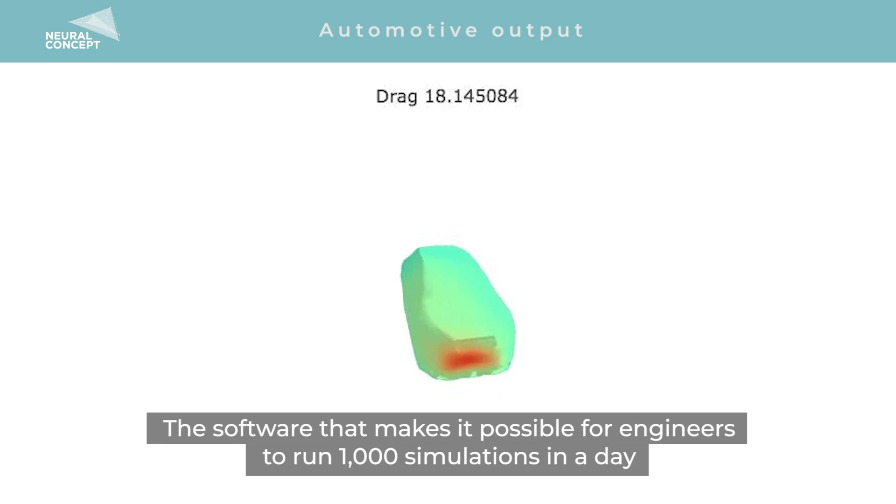Hello everyone, my name is Pierre Baque. I'm the founder of Neural Concept, the software that makes it possible for engineers to run 1000 simulations in a day and to design 20% more efficient products. Please, let me tell you about our story.

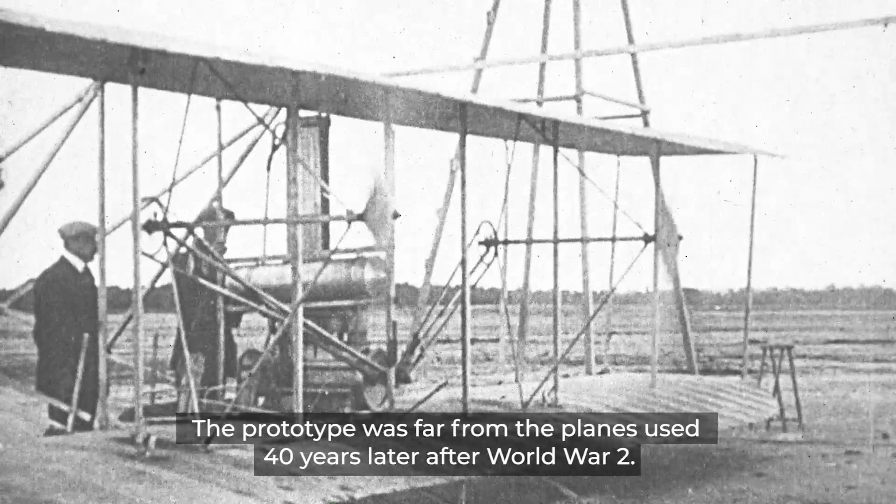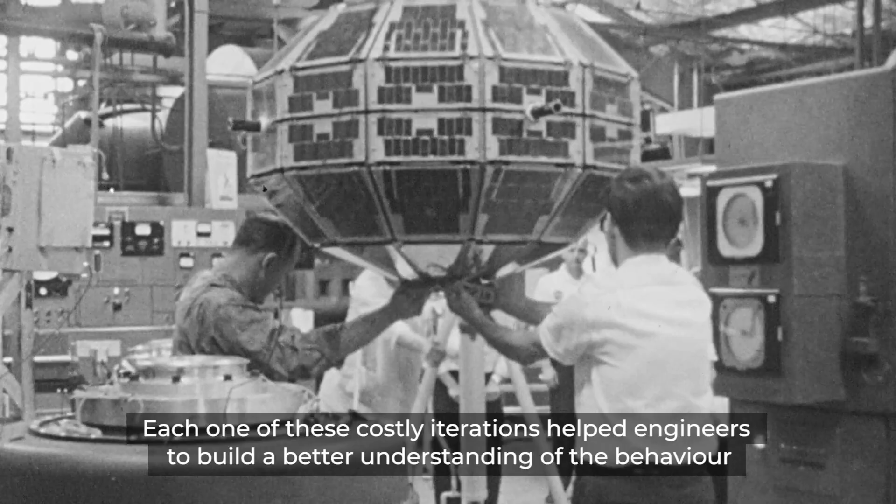120 years ago, the Wright brothers made the first successful manned aircraft flight in history. The prototype was far from the planes used 40 years later after World War II. This evolution was possible thanks to the efforts of millions of engineers who created and tested thousands of prototypes. Each one of these costly iterations helped engineers build a better understanding of the behavior of the aircraft and derive some general rules.

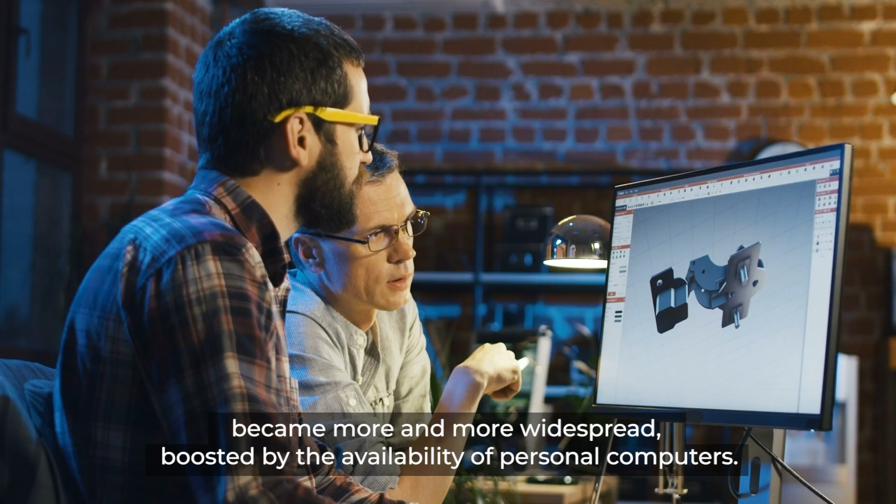These rules and intuitions would then be used to guide further design iterations. Starting from the 80s, the usage of numerical simulation in engineering became more and more widespread, boosted by the availability of personal computers. Numerical simulations are now used in every field of engineering, ranging from nuclear physics simulations for the control of energy reactors to the simulation of blood fluid mechanics for the prevention of heart attacks.

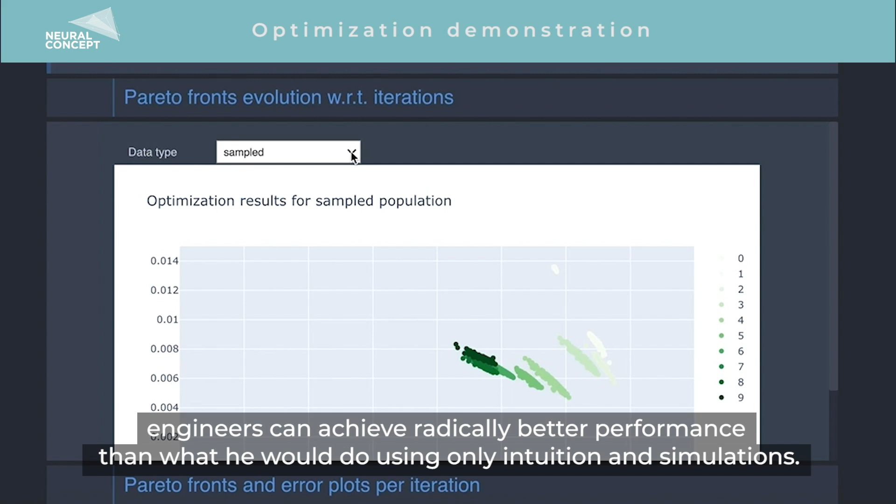As we have entered the 21st century, simulations have become ubiquitous to engineering, but humanity is confronted with new, seemingly unsolvable technological challenges. One hope is that with the help of a computer and complex algorithms, engineers can achieve radically better performance than what he would do using only his intuition and simulations.

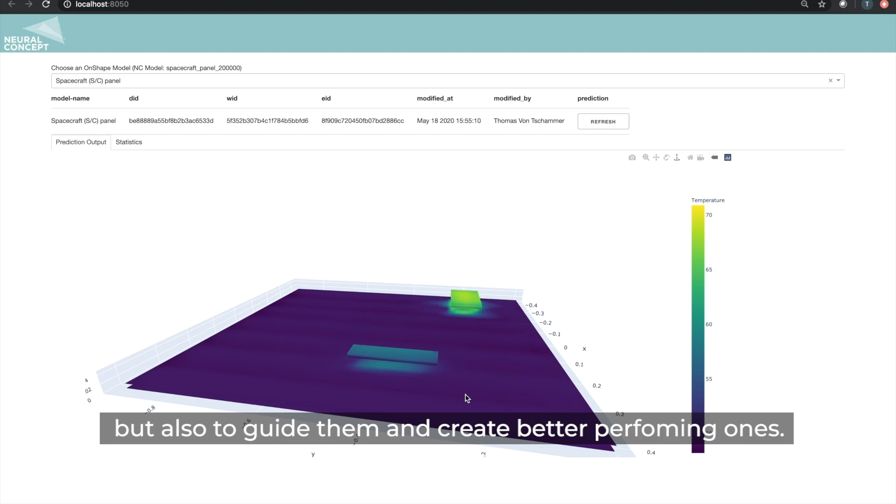Today, already, these optimization algorithms created 50% lighter parts for an Airbus plane or a 20% more energy efficient drone. Neural Concept provides engineers with the right tools not only to evaluate man-made designs, but also to guide them and create better performing ones. With the help of a computer, an engineer can achieve radically better performance than what he would do only using his intuition and traditional simulation tools.

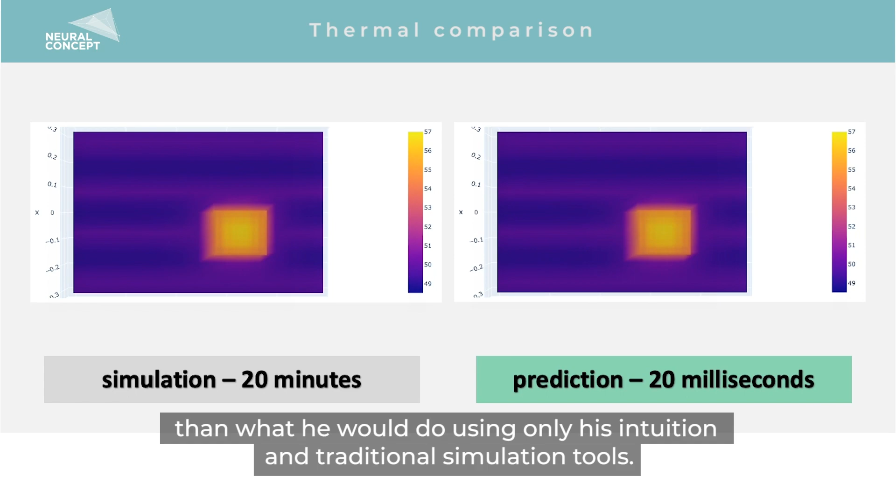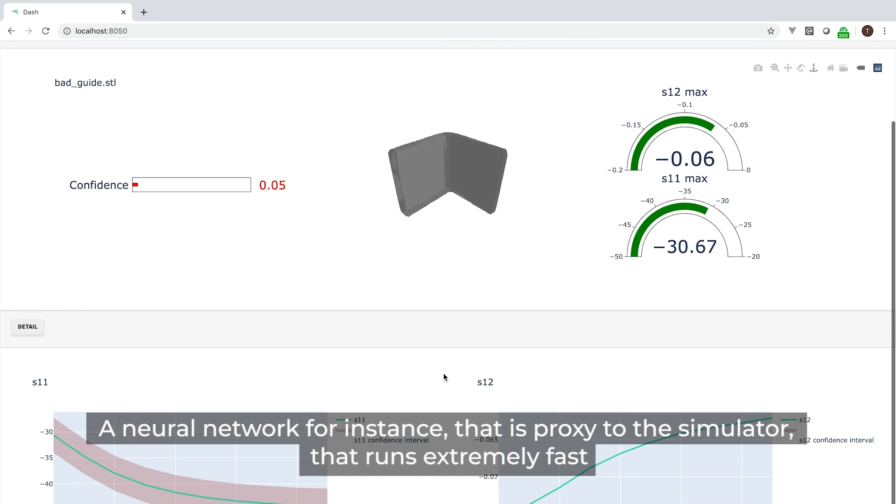One of the core difficulties is the fact that numerical simulations are very slow, and like a human, an optimization algorithm needs to test its hypotheses and simulate them many times. Therefore, an alternative is to introduce a third algorithm, a neural network for instance, that is a proxy to the simulator, that runs extremely fast and makes it possible to explore millions of possible designs in a day.

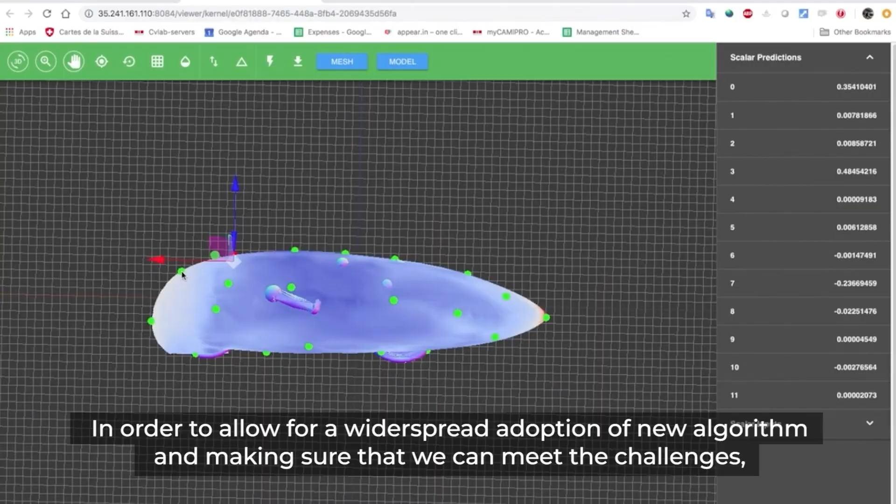More than a century after the Wright brothers, nowadays engineers are faced with radically different and new challenges. Neural Concept is working with industrial leaders across the globe, such as Airbus, Safran, or Bosch, in order to allow for widespread adoption of new algorithms and making sure that we can meet the challenges, for instance, of making an electric or hydrogen-powered plane make commercial flights across the Atlantic.

This is the team of Neural Concept that is working on developing this concept relentlessly every day for more than 4 years. Neural Concept is the company that I founded. And today I'm going to start this more detailed presentation about what we do with a very nice and inspiring example, a sports example and a world record.

On September 13th, 2019, two riders, French riders from the same team, broke two world records in two categories for human vehicle speed, breaking the previous benchmark by a wide margin. For instance, the bicycle reached a speed of 136.7 kilometers per hour. This tremendous improvement in speed was attributed to a large extent to the external aerodynamics of the hull of the bicycle.

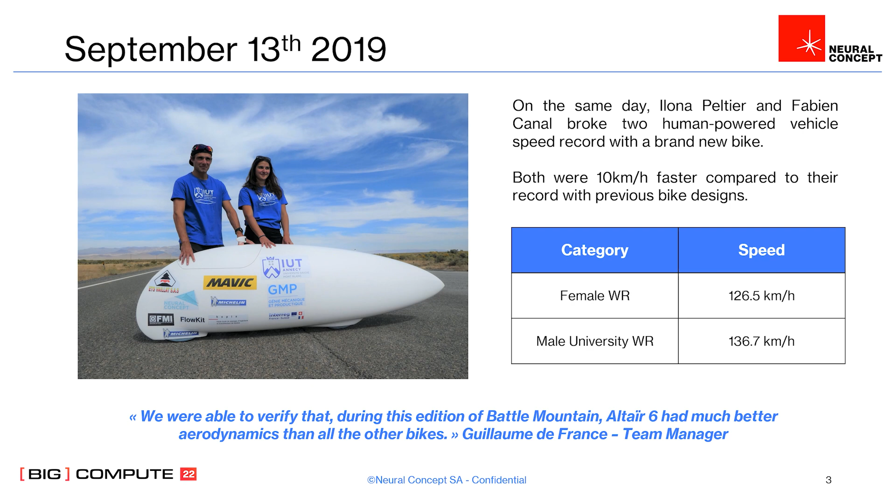How did this happen, and how was this made possible? Guillaume de France, who is the team manager and who was designing the external aerodynamics of the bicycle as well, was usually working and iterating with a team of CFD analysts to whom he was sending design proposals, and they were coming back with CFD results and optimization proposals to Guillaume in order to improve the bicycle. However, as time was getting tighter and tighter, and Guillaume was getting close to the deadline for completing the project, different constraints and different situations were entering into place.

For instance, changing the rider, a new gear system, a new size of wheel, and so on. All these changes had to be taken in very quickly, making it also difficult to keep the design optimal for the bike. That's how we started working with Guillaume to introduce a new workflow, a new design approach, where instead of working directly with the CFD analyst team, Guillaume was working with a centralized AI system, learning from the data produced by the CFD team.

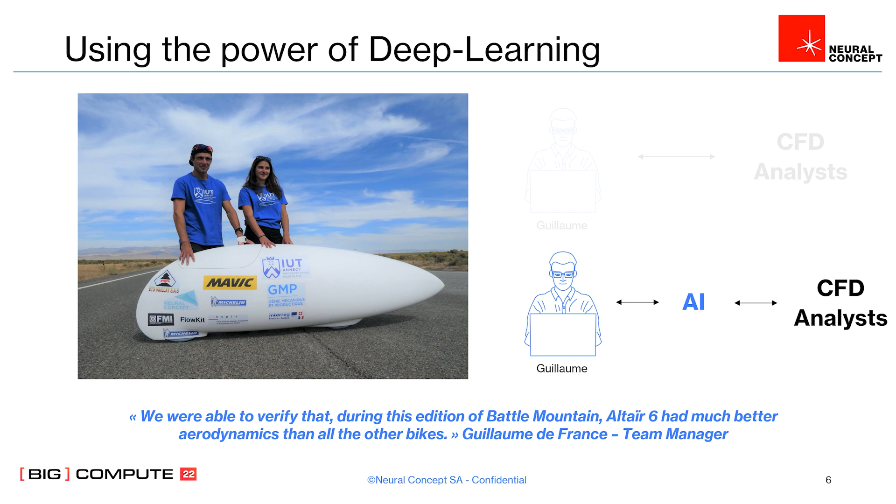Guillaume was able to interact and interrogate directly the AI system to get optimization and simulation results in a very quick and fast manner. So how did it work, and how was that possible?

The core technology that Neural Concept is using in everything that we develop within our product is mostly based on deep learning. Deep learning is a quite old technology based on neural networks, but it really started regaining interest around 2012, where it started completely redefining benchmarks in image processing and natural language processing. And progressively, it went on to revolutionize other domains of computer science, ranging from games to 3D reconstruction.

And nowadays, we see a very interesting trend, since in the last few years, deep learning is also completely changing the way we think and design the physical world, starting from generative design for molecular discovery, and now having a tremendous impact in the domain of engineering and CAD/CAE.

So what is really different about deep learning? Many things are different compared to traditional machine learning algorithms, but one key element for me is the way the data is processed. In traditional machine learning approaches, the data is input to the learning system in a completely abstract way, using a set of design parameters, or parameters representing personal information such as age, sex, or city for a person, but it can also be the number of occurrences of words in a text or a set of design parameters, and the data will be represented and processed in almost the same way.

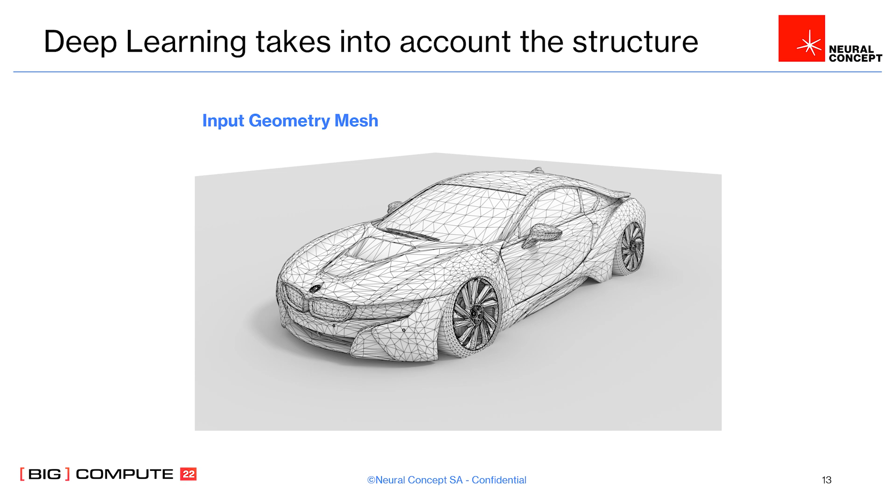Similarly, if you're processing information from a molecule, you might want to use graph neural networks that take into account the physical structure of the graph representing the molecule. And in engineering, if you process a 3D geometry, a CAD represented as a mesh, you can use specific algorithms that respect the physical structure and nature of this 3D mesh.

One of the core and typical things that we do at Neural Concept is to emulate and learn to reproduce numerical simulations. Typically, we take a data set of simulations represented by pairs of CAD geometry and simulation outputs, and then we learn to reproduce the output of a numerical simulation without actually running it, directly starting from a raw CAD geometry.

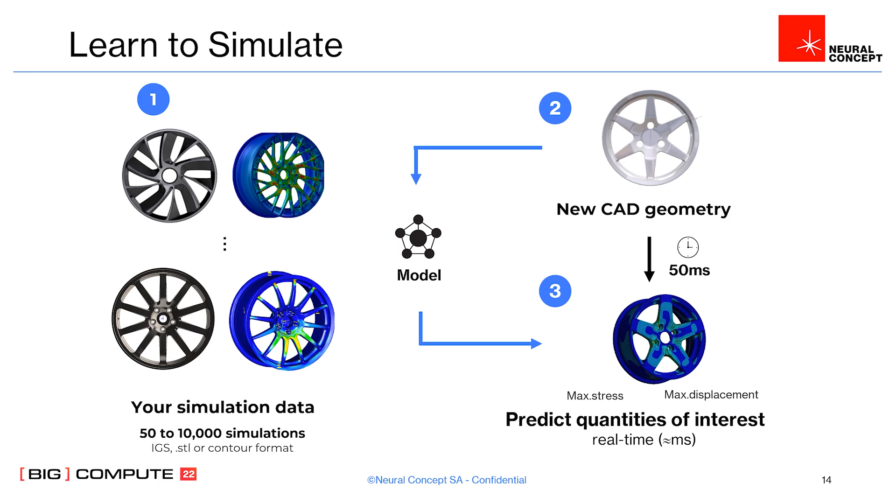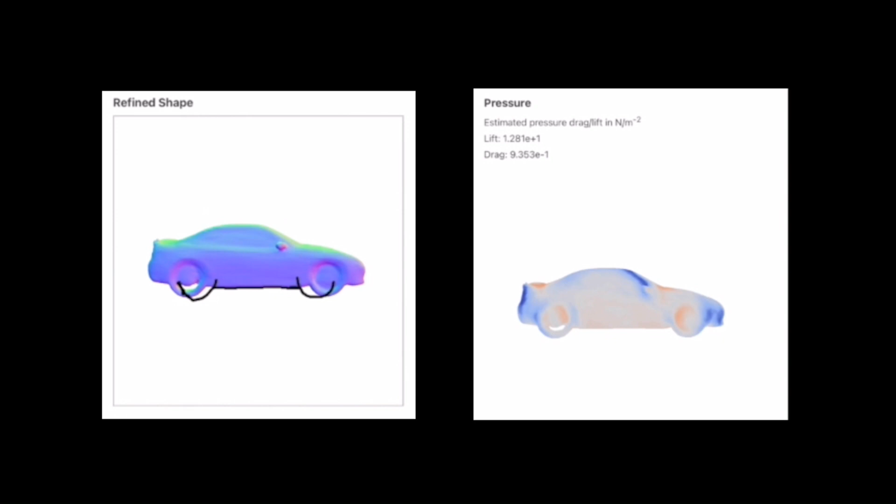Another example of what can be done with these neural networks is to recreate a 3D geometry directly from a drawing, a sketch of a vehicle or of a geometry. In this example with car design, a designer can sketch in 2D from any point of view the geometry of a vehicle, which is regenerated in 3D.

By coupling this with the example I showed before, the ability of emulating numerical simulations directly from 3D, it is possible to chain these two modules and get directly aerodynamic prediction from a sketch, as you can see in this example here.

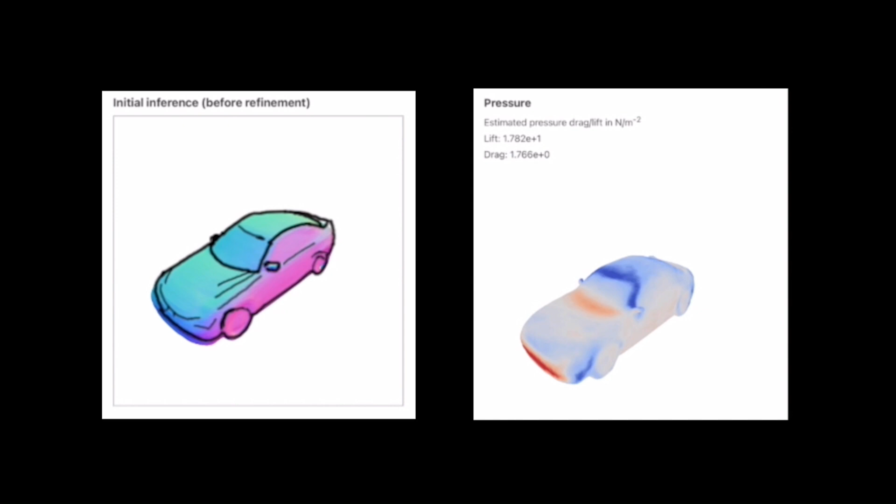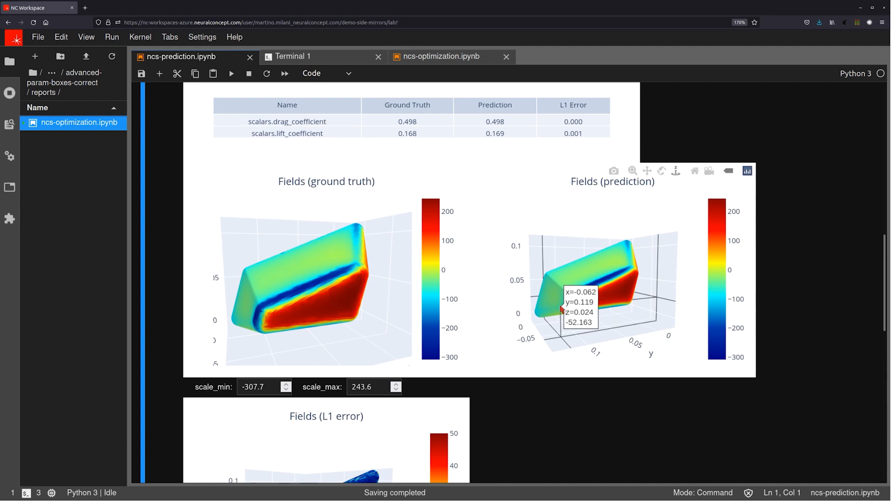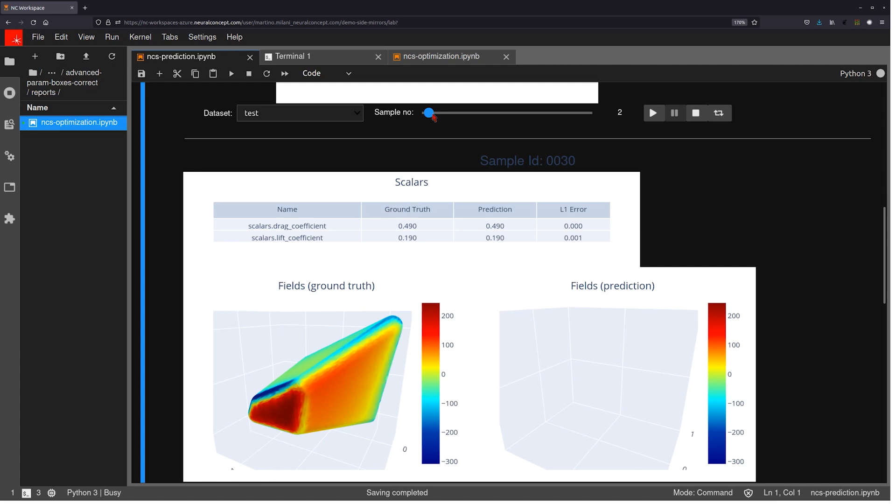This is an example of how the tool developed by Neural Concept works, and how an advanced scientist can use it to analyze and validate the prediction of a neural network. Here, the expert is comparing the prediction and the simulation for external aerodynamics of a side view mirror in automotive design, and we see that we can get quite close, arbitrarily close actually, to the real simulation.

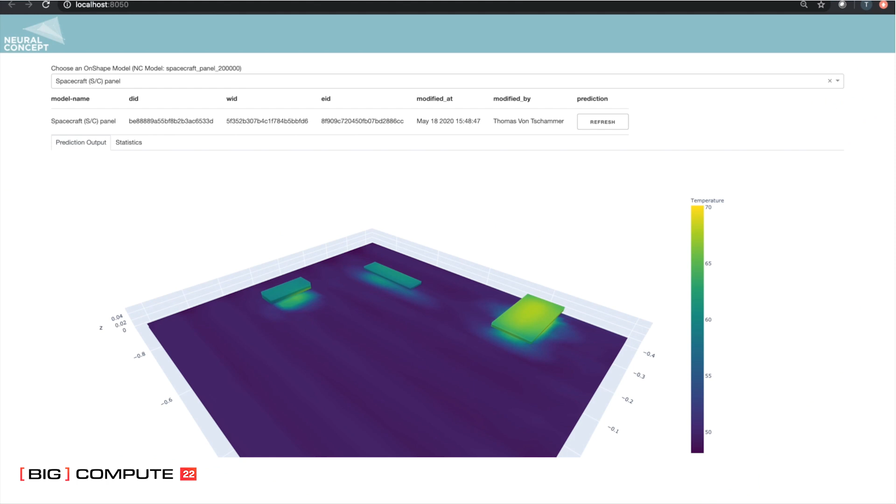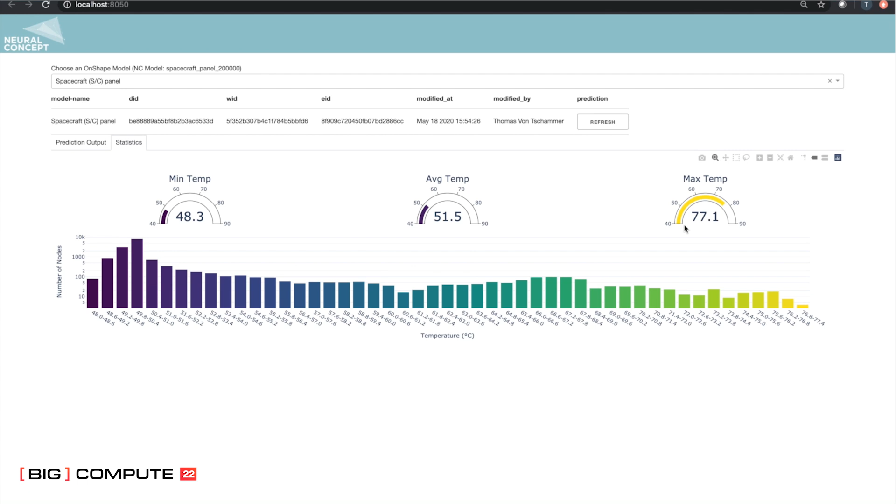Once these predictions have been validated and we've checked that the simulation and the prediction give sufficiently close results, they can be coupled to a CAD system to get instant simulation results directly from the geometries generated and designed within that system. Here's an example for a cold plate design for cooling electronic components in a satellite panel.

But this is also applicable to cold plates in the automotive industry, for instance.

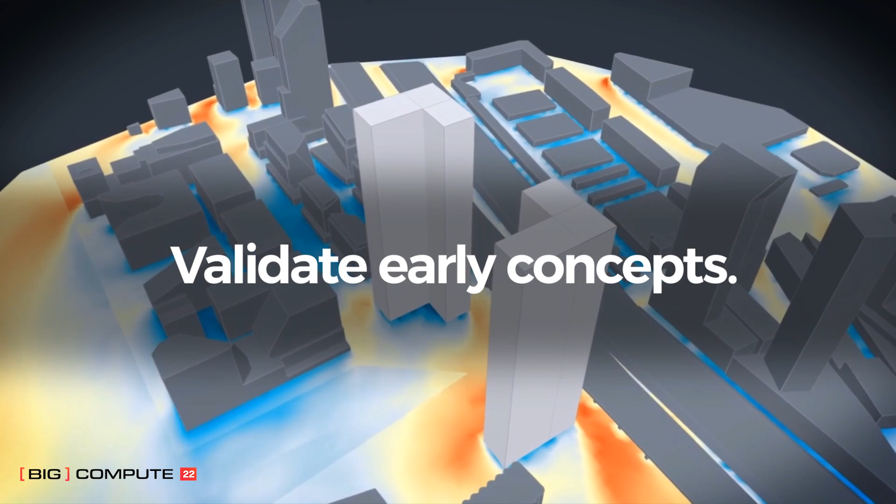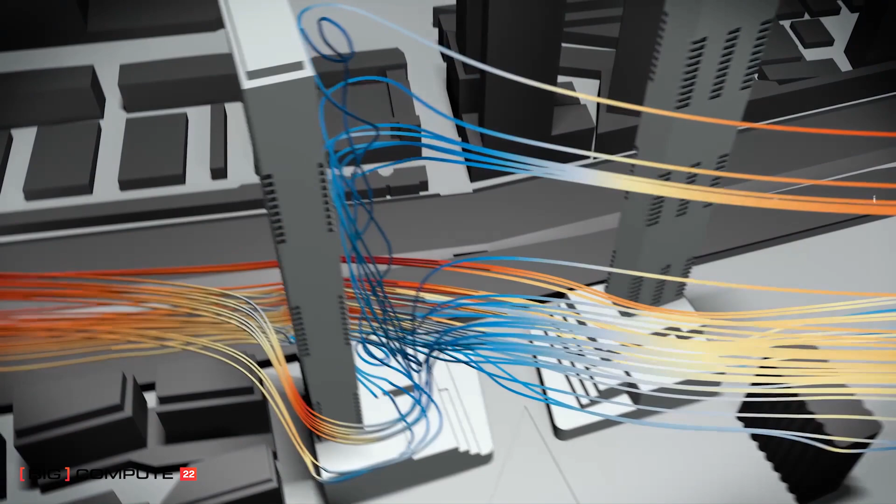In the context of our partnership and collaboration with the company Orbital Stack, a subpart of RWDI, we have been able to learn from a very large data set of numerical simulations and physical experiments for pedestrian comfort analysis and external aerodynamics in cities, and built a predictive model able to give instantaneous results for different configurations of external aerodynamics on cities, while getting an accuracy that is very close, and sometimes even better, than RANS analysis that normally take hours or days.

And this is really a revolution in the way designers can design and the way architects can think about external aerodynamics and pedestrian comfort in cities.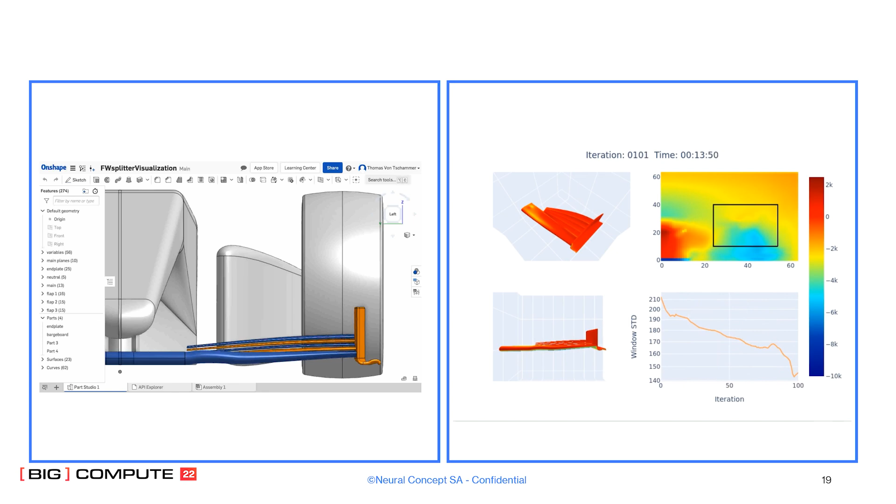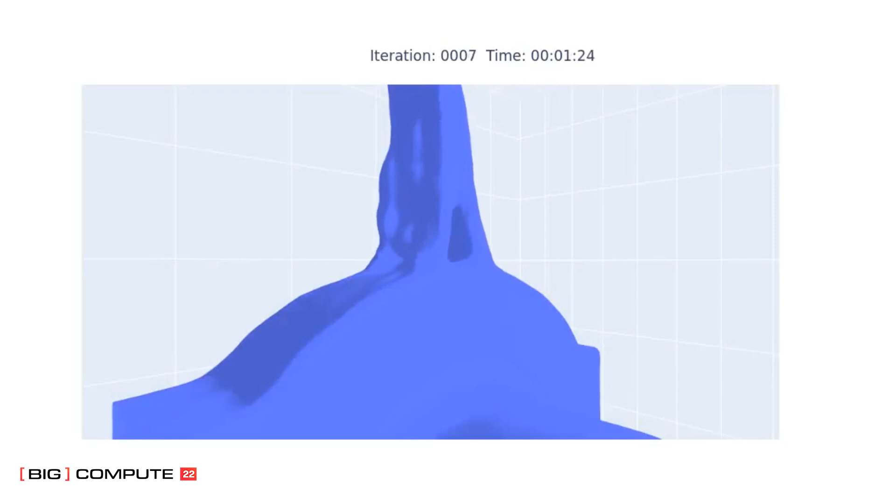In the previous example, we were optimizing directly in the space of the CAD geometry, modifying it directly. But it's also possible to generate a 3D geometry in a much freer way, completely changing the topology of the design in an arbitrary manner. This is similar to topology optimization, but with a model of much larger and faster scope.

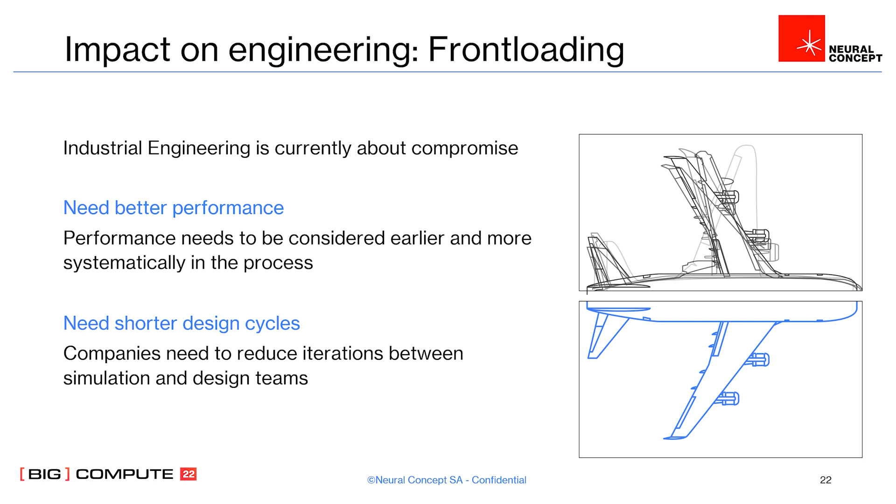Today in engineering, everything is about solving a trade-off: the need to get always better performance, considering the performance of the design and the physics earlier in the design process, versus the need to shorten design cycles, reducing iterations between design teams and simulation teams, which are often one of the core bottlenecks of the process.

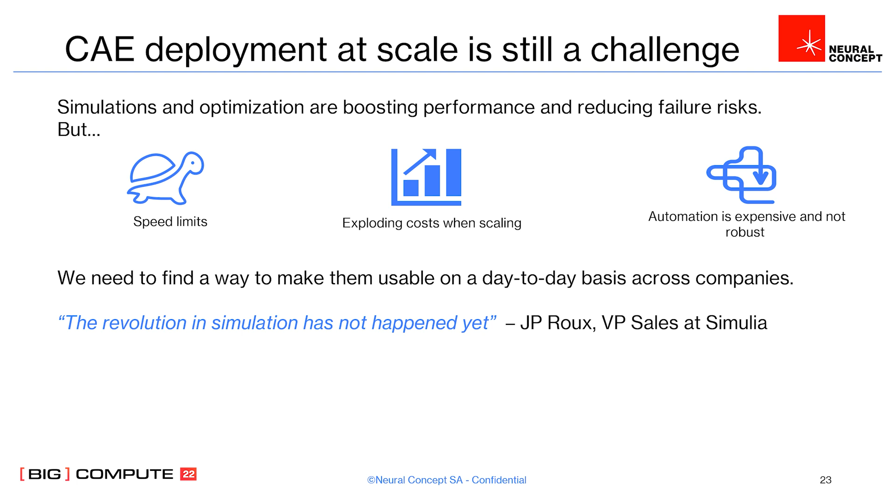The simulation tools developed and deployed over the past 20 years have helped a lot in reducing the risk of failures for prototypes and improving product performance, but they have fallen short in day-to-day analysis and helping designers come up faster with better designs, leveraging the knowledge and data from within the company.

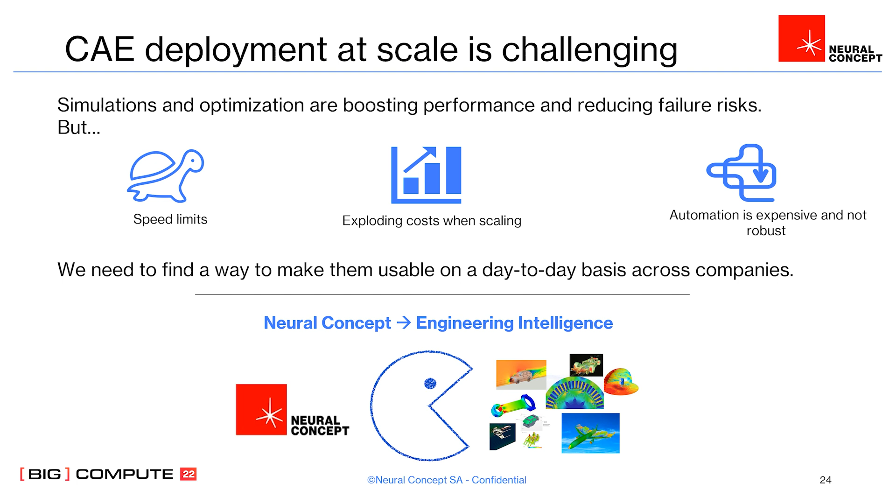This is exactly what Neural Concept does, exploiting the concept of engineering intelligence: learning from all the data generated within the company related to design and simulation, in order to simplify design workflows and make them very fast, very accurate, and accessible to any design engineer.

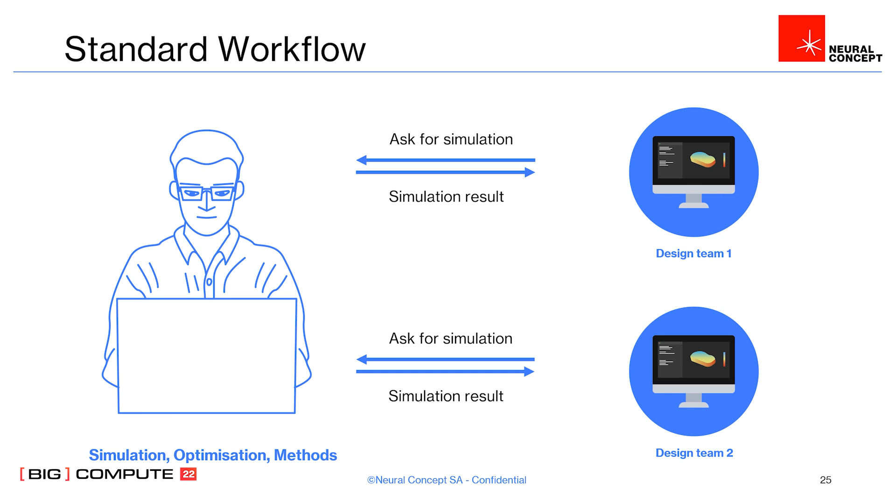We are moving from a paradigm where on one side there's the simulation team, on the other side the design team, iterating by exchanging files or using a centralized system, which is very time consuming and means iterations can take maybe a week.

We're moving to a new paradigm where the simulation expert also becomes a data science expert, able to train and validate neural network models that are then deployed to design teams, who can run their simulation and optimization workflows very fast, within a minute or a few minutes, completely independently from the simulation team.

Of course, the simulation team will sometimes have to be brought back in the loop in order to resimulate or retrain the models.

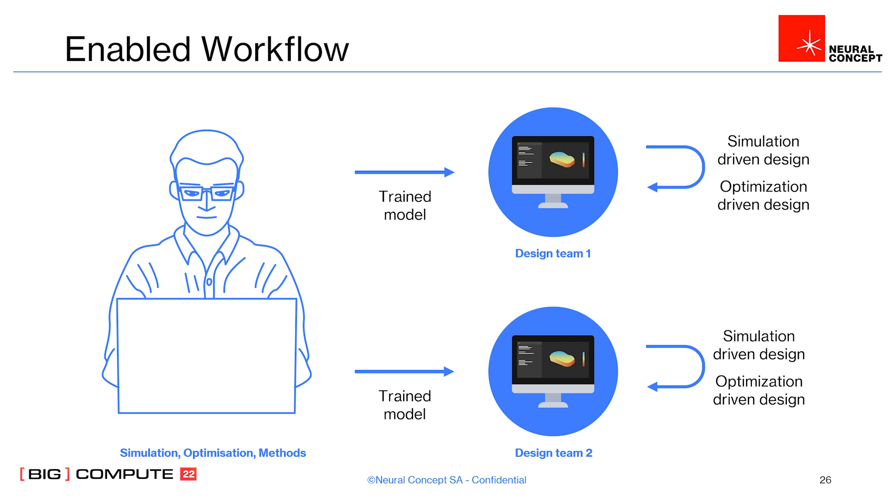The first adopters of this technology, and the typical companies we work with today, are in the space of manufacturing. We see very strong business challenges for these companies, including the need to move to smaller lot sizes and therefore have a more agile design process that allows for more customization.

There's also a move to shorter release cycles—for instance, 2-year release cycles in the automotive industry, whereas before it was more around 6 years—and very strong competition at all levels across OEMs and especially across suppliers of the automotive industry, though this isn't only in automotive.

And the simulation capabilities that have been well consolidated over the last few years are a very good and important stepping stone for going to the next level, which is engineering intelligence.

The technical response provided by engineering intelligence is the ability to get instant feedback on design performance for any designer, to be guided towards better design options, and to explore a much wider design space than was previously available.

This technology is being adopted by a growing base of users and companies across the world.

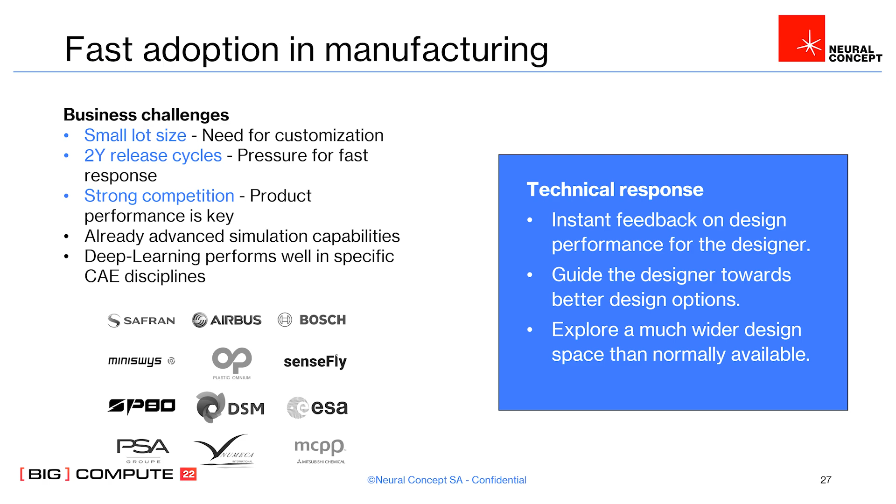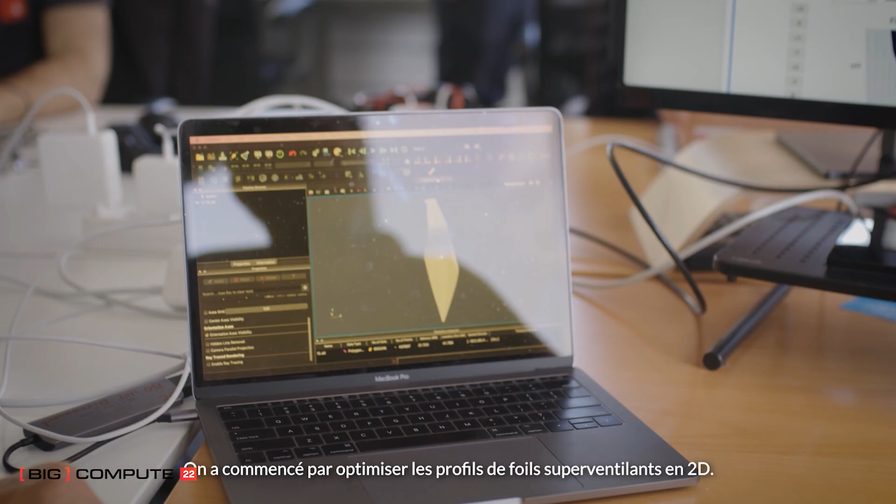I started the presentation with an example in the sports domain, and I'll continue with another, through our collaboration with team SP80, a Swiss team developing a new boat concept aiming at breaking the sailing speed world record next year. This team is working on a very interesting and ambitious concept of superventilating hydrofoils, which poses a strong challenge in terms of optimization and coupled optimization between fluid dynamics and structure.

They're using the Neural Concept platform to couple simulations from Abaqus on the structural side and Fluent on the fluid side, trying to push further the limits of what's possible with the concept of superventilating hydrofoil.

We really wish them all the best of luck for their world record attempt next year.